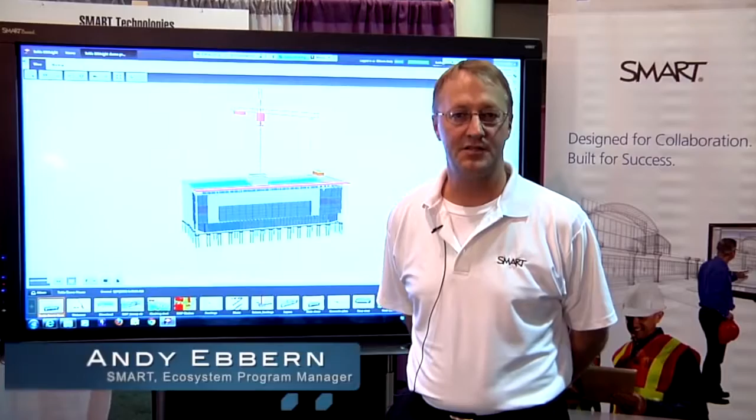Hi, I'm Andy. I'm with Smart Technologies, and we're here at the DBIA Expo to showcase the latest integration between Smart Technologies' Smart Interactive Display and Tekla BIMsight. We've worked together with Tekla to create an integration between our two product families to dramatically enhance the collaboration of coordination reviews for the construction industry.

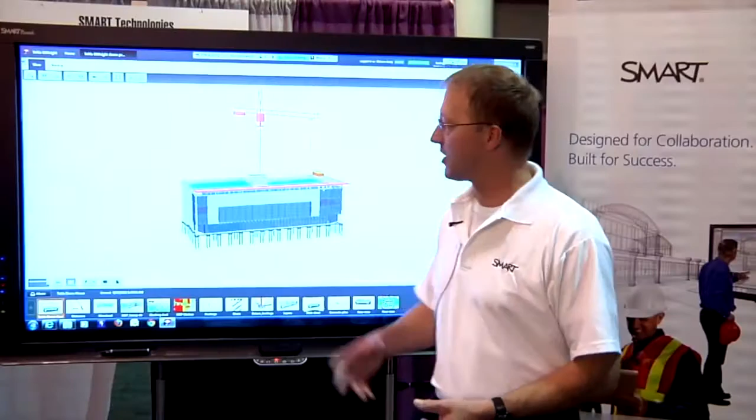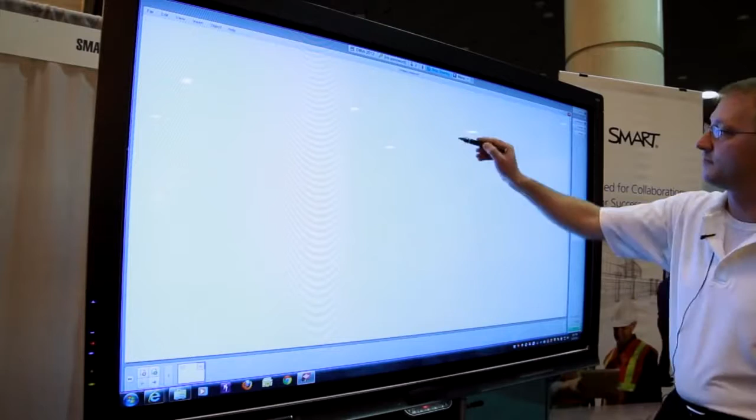So what I'm running here is Tekla BIMsight, the latest version, running on a smart board. It's our 8070i model. I'm also running the Smart Freestorm Visual Collaboration Solution software, which allows me to toggle back and forth between my whiteboard, where I can take notes, and my desktop, where I'm running my BIM. So in Tekla BIMsight, let me just go to another model here.

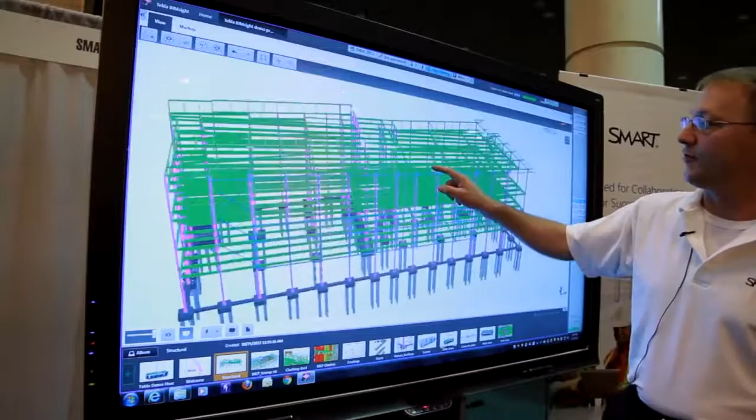A core part of the integration was to include gestures as a means to navigate through the model. So now, taking advantage of the smart touch recognition, with one finger I can orbit about the model, with two fingers I can zoom in, and I can pan and get to a point where maybe I'm with my construction team and I want to review an issue we're having with the model.

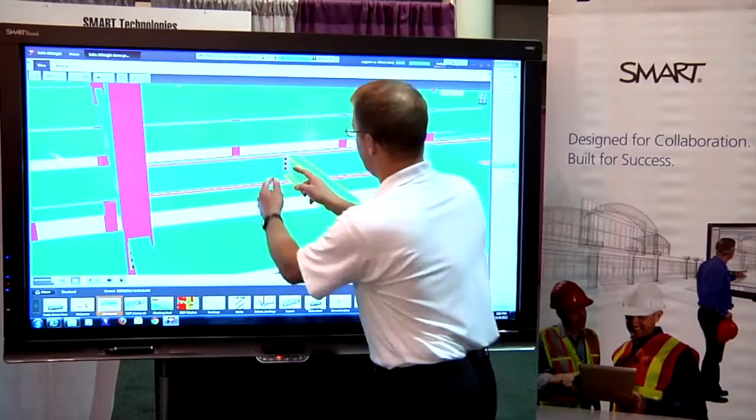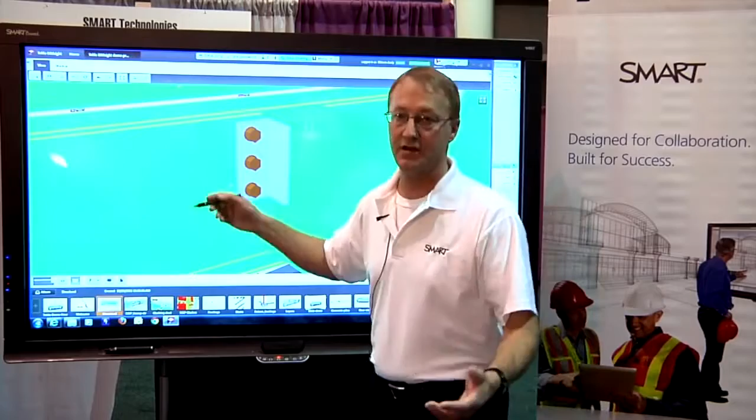The integration also allows me to pick up the smartboard pen and make annotation redline markups directly into the BIM model, not as an overlay, but actually as part of the model. So now when I navigate through the model, the ink stays with my view.

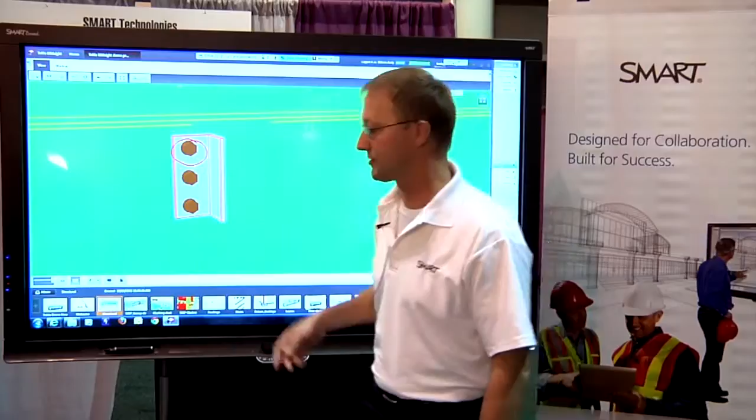Because I'm running Freestorm collaboration software, I can also share this with remote users using another smartboard, a laptop, or an iPad, who can take their ink and also make annotations directly into the model remotely. This is now part of the model, and the ink stays with the object I've annotated on. That's a key part of the integration that Tekla BIMsight has done with Smart Technologies.

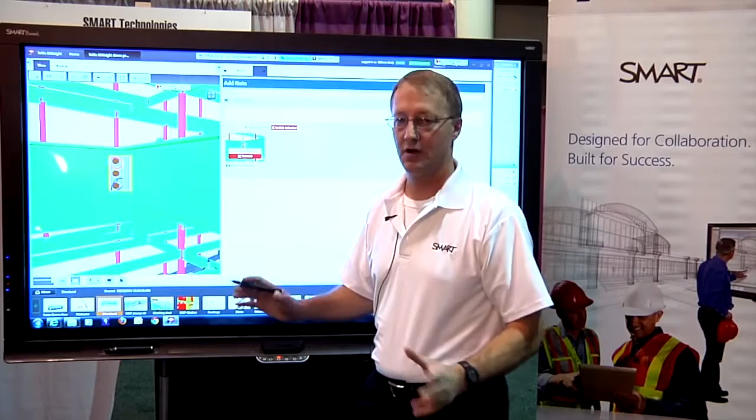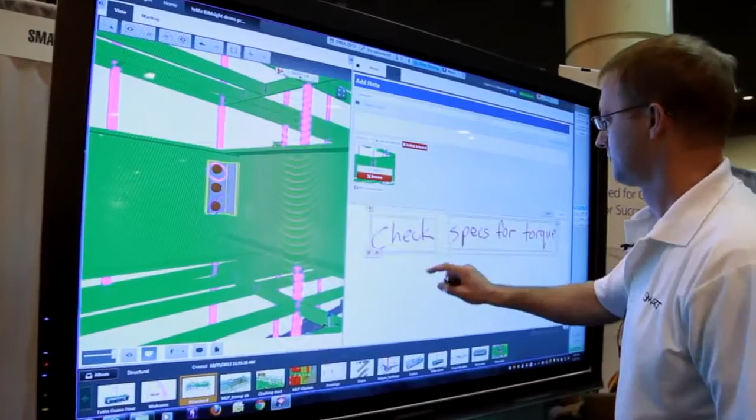Now that I have the view and the initial markup of the model, I can add additional notes about it using the BIMsight note capability. By using the Smart Ink, I can handwrite my notes and inject them directly into the notes field. I just touch where I want the notes to go, and they're captured and taken right in.

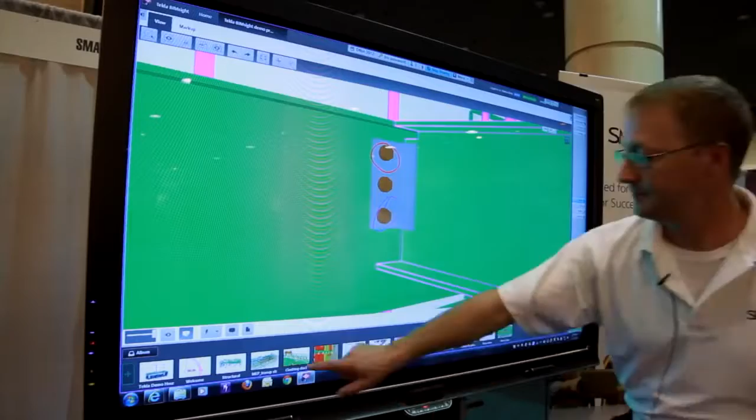Another capability unique to this is that I don't have to make my markups or notes directly into the model itself, but I can take screen captures using Meeting Pro and do ad hoc notes in a whiteboard scenario. So let's say I want to go back to my main view of the structure, and I want to zoom in, and I'm looking at the footings now, and maybe I want to do some ad hoc notes on this.

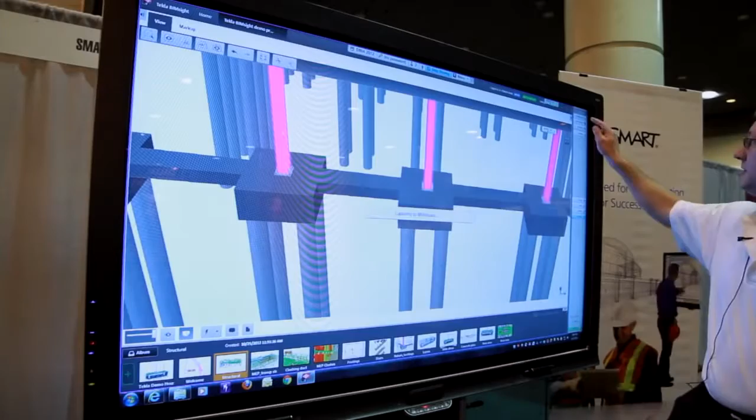With my Smart Meeting Pro whiteboard capture, I just drag the area that I want to review, go back into my whiteboard, and now I have an image in my whiteboard that I can resize, move around, and most importantly, add additional detail.

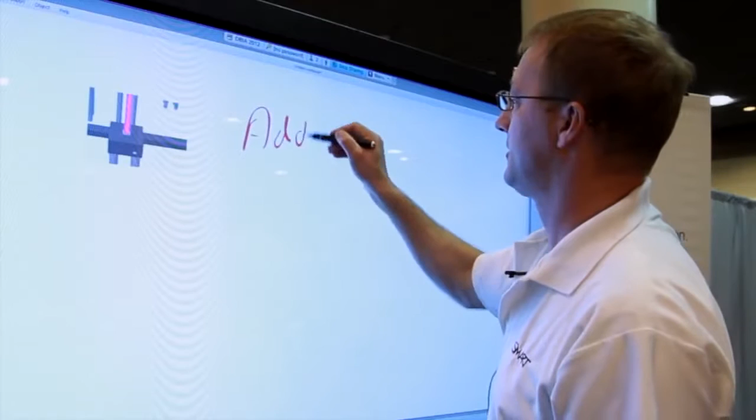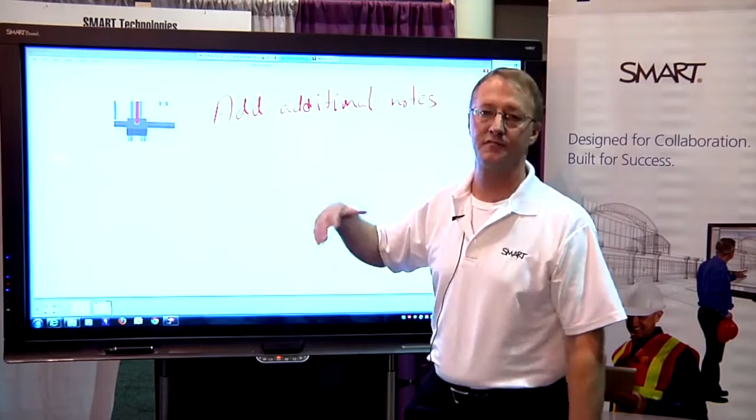And I can add as many of these captures as I want, save this as a PDF, and distribute it to the team members electronically. One thing that's really important to note is in my model, anything that I've added with Smart Ink as a note stays with the model, as well as the markups that I've added.

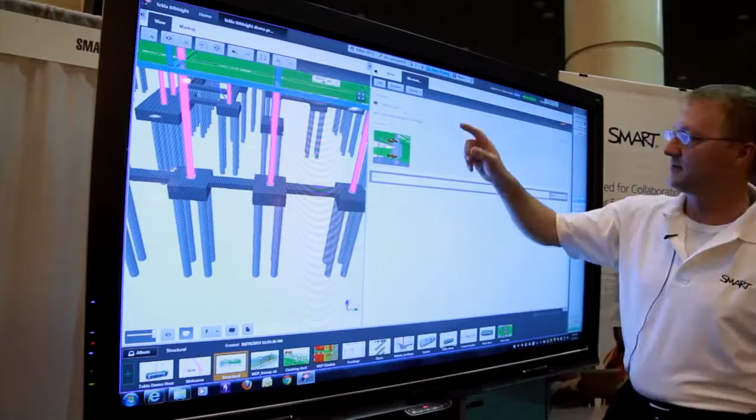So I'm going to go back into my notes here. Let's say we want to look at a note that I made earlier about the model. I double tap in the notes area, tap on the note, and now I'm back to my previous model. I still can annotate, I can navigate, add additional comments in here, and that stays as part of the model.

So the Smart Ink is now being embedded as part of the Tekla markup right into the model, and I still retain the ability to add additional notes on this side.